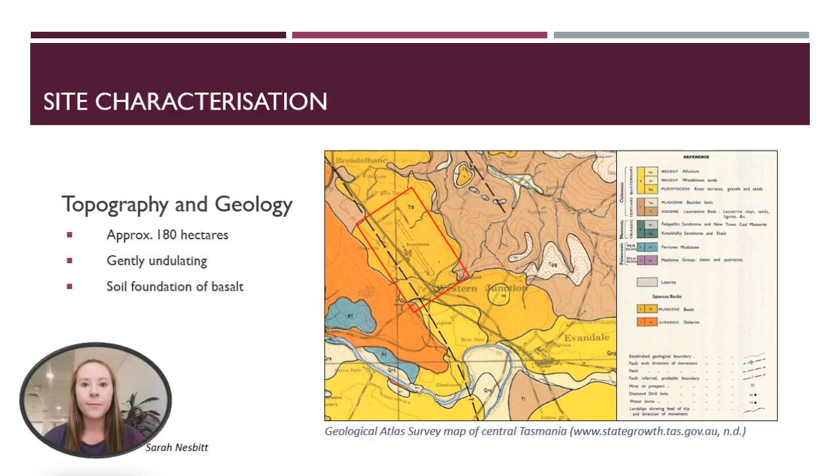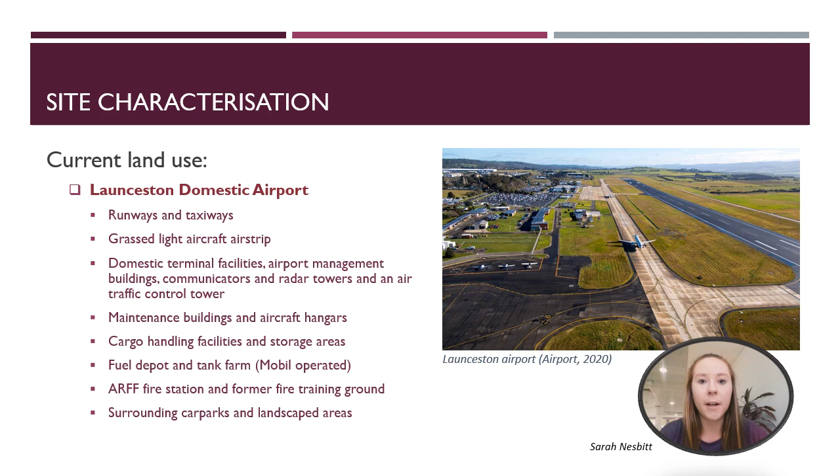Former land use. Prior to Launceston Airport, the land was used as the Royal Australian Air Force Base, aircraft rescue and firefighting station, and fire training ground, before the land was purchased by Australian Pacific Airports in 1998. The airport is accessible to commercial aircraft, air freight, and private operators and their respective passengers, visitors, and employees. Surrounding land. The airport is surrounded by agricultural farming land, residential land, and industrial estates.

The site has two underground monitoring wells. They're used at 2 metres and 12 metres depths. They record low seepage rates annually, with relatively high salinities, ranging from 500 milligrams per litre to 1500 milligrams per litre. The possibility of groundwater contamination in the vicinity of Launceston Airport and surrounding areas is moderate, with the nearest licensed bore located 2.4 kilometres northwest of the airport.

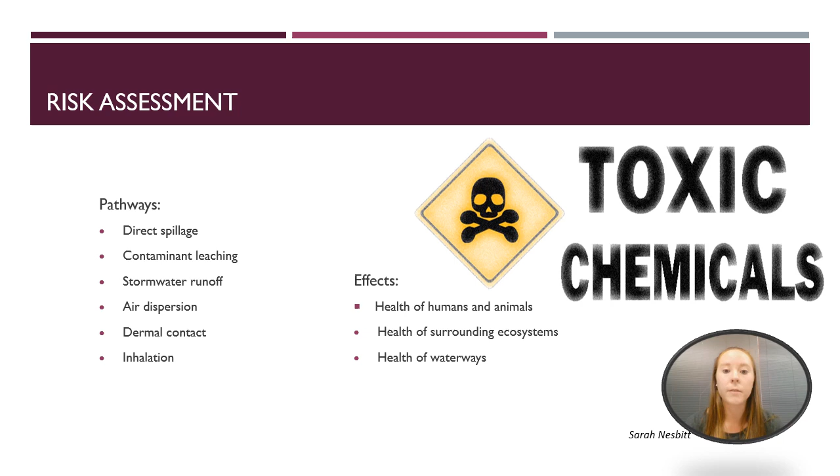Risk assessment. PFAS is a large group of compounds of fully fluorinated hydrophobic alkyl chains. Areas of potential concern include the aircraft rescue and firefighting station and vehicle maintenance areas, hangar areas from the Royal Australian Air Force, soil stockpiles, former waste detention ponds, and the Mobil fuel farm. Pathways of contaminants: direct spillage, contaminant leaching, stormwater runoff, air dispersion, dermal contact, and inhalation. Effects include the health of humans and animals, the health of surrounding ecosystems, and the health of waterways.

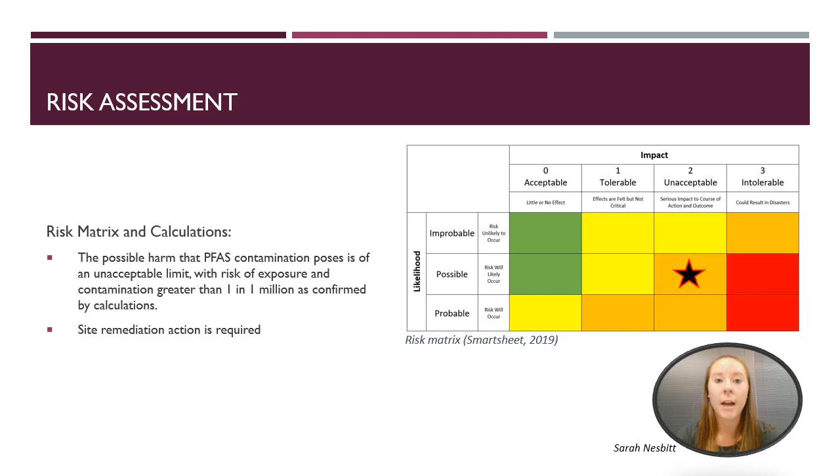Risk matrix. The risk matrix defines the impact and likelihood of detrimental circumstances involved with PFAS contamination at Launceston Airport. The possible harm that PFAS contamination poses is of an unacceptable limit, with the risk of exposure greater than 1 in 1 million, as confirmed by the calculations. It's likely that contamination and harm will occur to human health and the surrounding ecosystems. The star marked on the matrix represents the level of risk evident from the hazard of PFAS contamination at Launceston Airport. Site remediation action is required.

For the problem of per- or polyfluoroalkyl substance contaminated media, there are several approaches that can be employed, such as excavation and offsite disposal, containment-based approaches, or treatment-based methods. As we know, the excavation and removal of soil and sediments which contain PFAS and disposing to a landfill for further treatment is the most common and direct approach. However, PFAS does not only affect the surface soil; it can easily dissolve into groundwater and aquifers. Therefore, another approach is the pump and treat method, which is contained in the treatment-based methods.

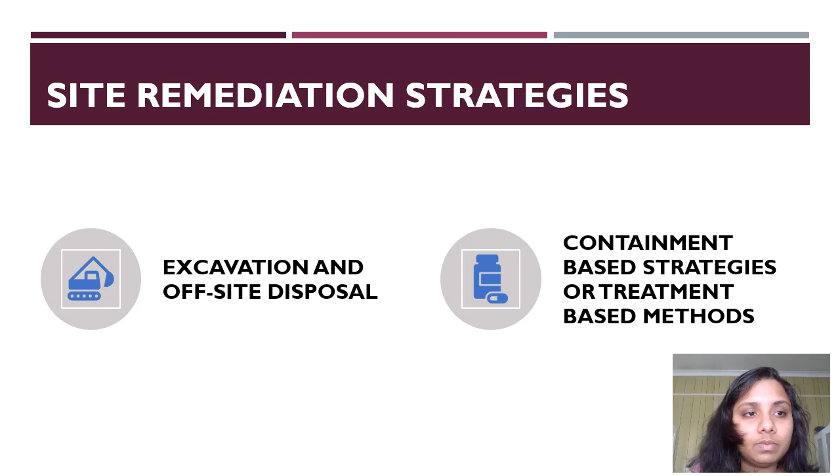As we can see, there are three main treatment-based methods. They are the pump and treat method, adsorption method, and bioremediation. The pump and treat method uses extraction, the removal of various carbon sorbent particles from the water, before giving it out for a proper drinking process. That is the pump and treat method. Water is pumped from the groundwater, the carbon component is removed and then treated and given out for drinking purposes.

The next one is adsorption treatment. The adsorption treatment strategy using activated carbon in both powdered and granular form to remove PFOA and PFOS from water bodies has been enhanced. At both laboratory and industry scale, using activated carbon adsorbents to remove PFAS provides significant impacts. It has two types of resins, cationic and anionic. The cationic resins are used for positive charge contaminant removal, and the anionic for negative charge removal.

In addition, another one is the bioremediation approach. Bioremediation is the process by which microorganisms are used to remove PFAS. The degradation of PFAS by microorganisms in the aerobic environment boosts the production of fluorinated products from the microbial transformation of the corresponding precursors. The various bacteria found are used for the removal of PFAS from various soil textures in the land. So these are the three being discussed. The rest, chemical and thermal treatment, are the other ones.

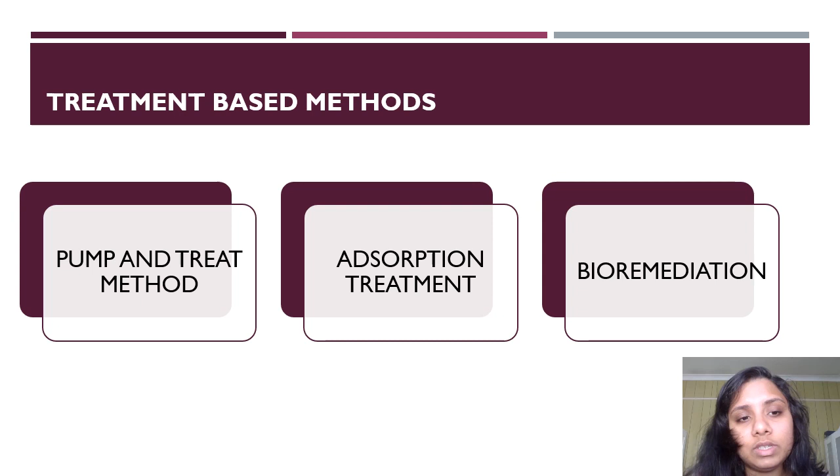Another chemical treatment is persulfate oxidation, which, supported with water at high temperature, provides significant impacts to the removal of PFOA. The removal efficiency of PFOA may achieve more than 97.5% with the presence of the persulfate oxidation elements as a terminal outcome of groundwater and soil contamination management.

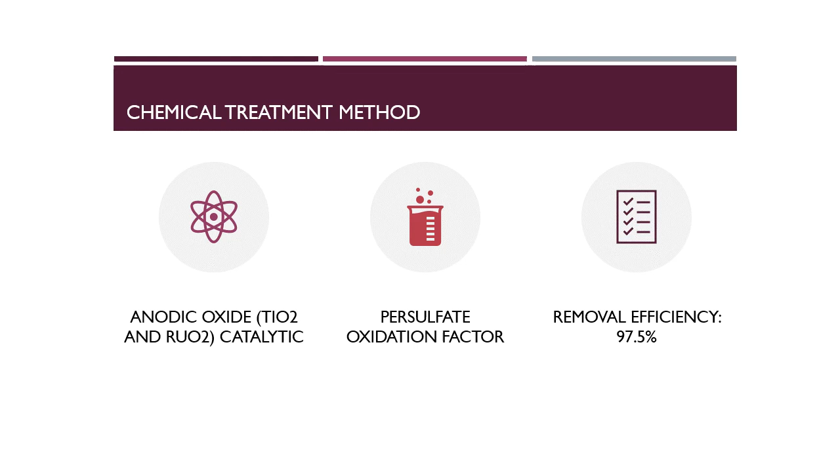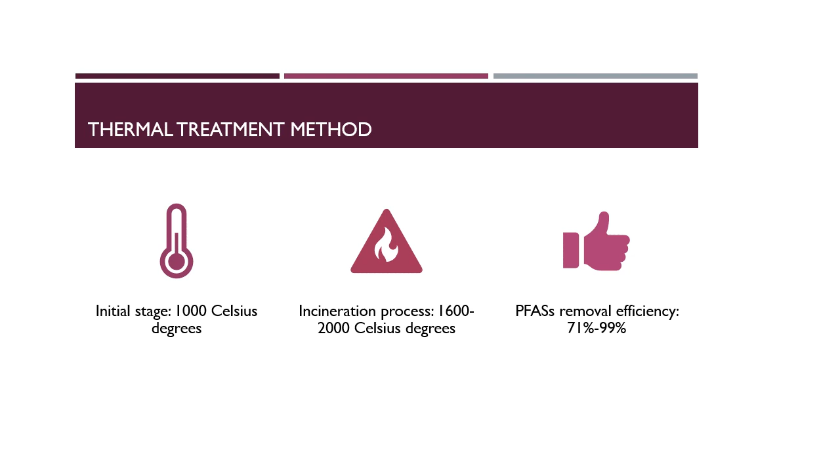In this section, I will talk about the costs associated with site remediation. The costs include the site investigation costs and soil remediation practice costs. The site investigation, also known as environmental site assessment, includes two phases. The first phase is preliminary site investigation. It involves a desktop study of the potential contamination on the site based on historical activities. The average cost for phase 1 is typically from $1,000 to $2,500.

If the phase 1 assessment reveals evidence of contaminating activities, a phase 2 environmental site assessment is required. Phase 2 is referred to as subsurface investigation, where samples of soil, groundwater, and gas are taken and tested. Phase 2 assessment normally costs about $5,000. The cost estimation has been done for in-situ thermal treatment. A few assumptions have been made. The contaminated area is assumed to be 2,000 square meters, with a depth of up to 12 meters, the deepest depth where groundwater is present. The soil bulk density is assumed to be 1.7 grams per cubic centimeter, which is equal to 1.7 tons per cubic meter.

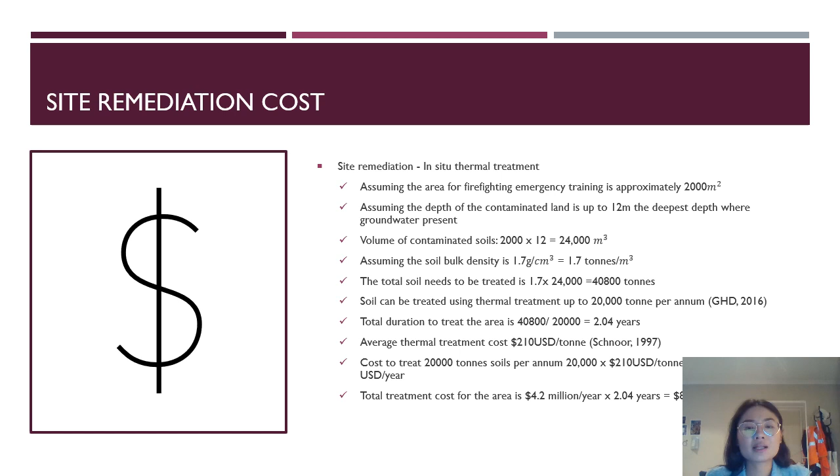The volume of contaminated soil is calculated to be 24,000 cubic meters, which gives 40,800 tons of soil to be treated. Thermal treatment capacity can be up to 20,000 tons per annum. Therefore, the time to treat the site completely is approximately 2 years, and the treatment cost is about $8,364,000. The total cost for site investigations is $7,500 plus the site remediation cost, giving an overall $8.4 million for the whole site treatment. In the next session, my teammates will talk about the actual site remediation and its effectiveness.

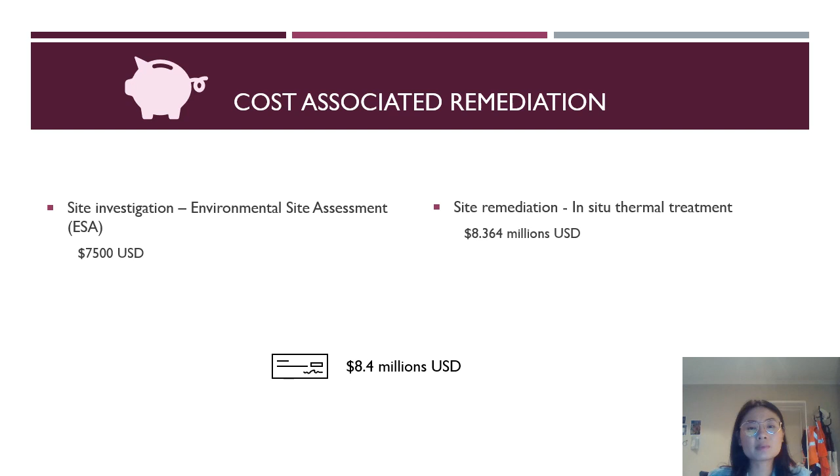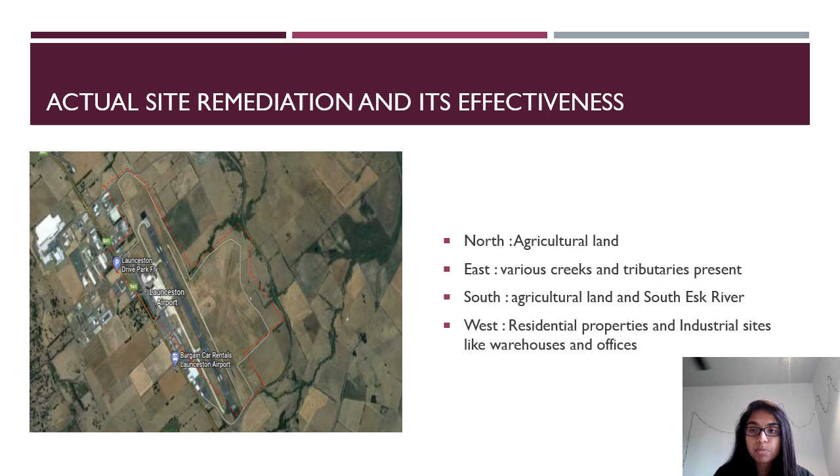We'll be talking about the actual site remediation at Launceston Airport. The north and south sides of the site have agricultural land. On the east side, there are various creeks and tributaries. On the west side, there are residential properties and industrial sites like warehouses and offices. So surrounding the airport, there are possible exposure pathways. There are different ways the contaminant can affect the soil, groundwater, surface water, humans, and other things. The pathways for possible exposure are direct spillage, contaminant leaching, stormwater runoff, dermal contact, dust inhalation, and agricultural crops.

The hierarchy for PFAS management according to the National Environmental Management Plan is as follows. The first is isolation, treatment, or destruction. The second is on-site encapsulation in an engineered structure with or without chemicals. The third is removal of the contaminant off-site to a separate landfill. The remediation carried out so far at Launceston Airport is the excavation of 100 tons of PFAS-infected soil, which was sent to a local facility and destroyed at really high temperature. The second is control of the soil stockpile at the site. The third is the application of a trench to remove hazardous groundwater. Finally, the former fire training site has been covered to inhibit the toxicity of the rainfall.

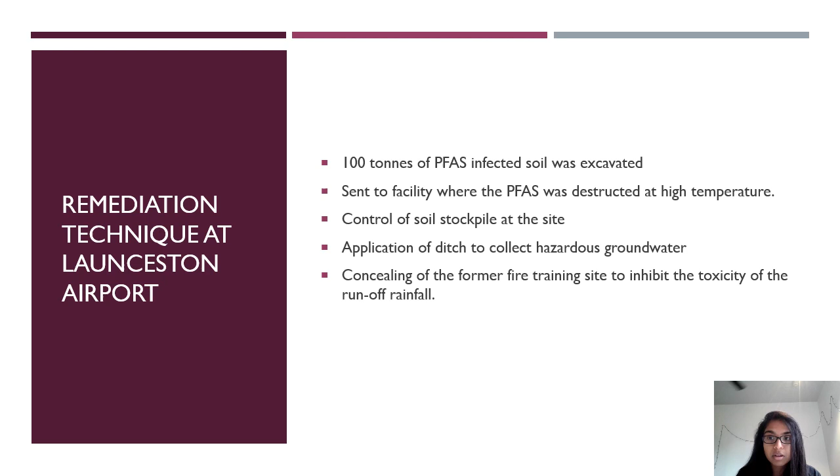So it has been found that perfluoroalkyl and polyfluoroalkyl substances can cause different health risks to people living near the airport. We calculated that the risk is more than 1 in 1 million, which is still unacceptable, and different procedures can be and have already been taken to decontaminate the soil, such as excavating the soil, moving it to a different place, and treating it with methods such as chemical or thermal treatment to destroy the substances contaminating the soil.

We cannot say enough that total elimination of this contamination is needed, because this substance still poses a high risk to human life, the people living near the airport, as well as the surrounding ecosystem. The amount existing right now can cause a huge health risk to those people. So the local authorities, local government, and airport authorities should work together to remediate this problem as soon as possible.